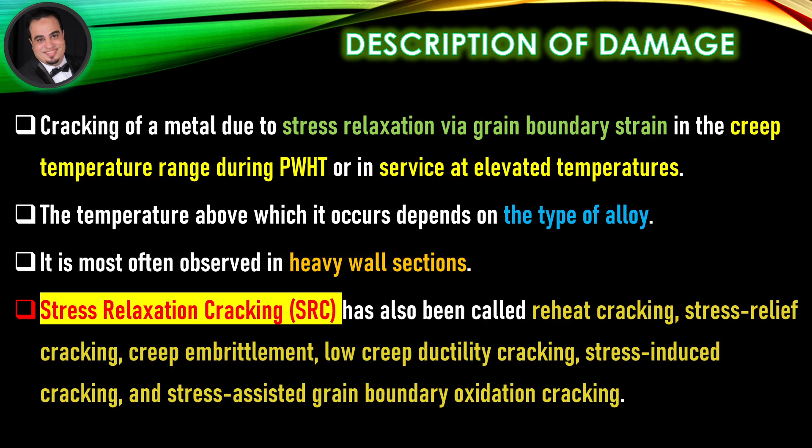Affected materials: chromium molybdenum steels, especially 2-1/4 chromium 1 molybdenum steel with vanadium added, 1 chromium 1/2 molybdenum, and 1-1/4 chromium 1/2 molybdenum. Types 304H, 316H, 321, and 347 stainless steel.

Nickel-based alloys, particularly alloy 800H, 800HT, alloy 617, and centrifugally cast 22 chromium 35 nickel niobium, used for heavy wall piping and headers in hydrogen reformer heaters. High-strength low-alloy steels are very susceptible.

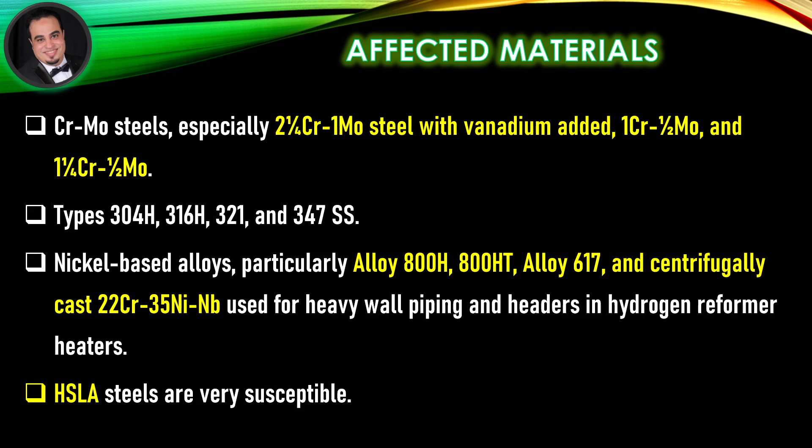Critical factors: in addition to exposure to elevated temperature in the creep range, important parameters include the type of material, chemical composition, impurity elements, grain size, weld metal and base metal strength, residual stresses from fabrication, cold working, welding, section thickness which controls restraint and stress state, notches and stress concentrators, and welding and heat treating applied.

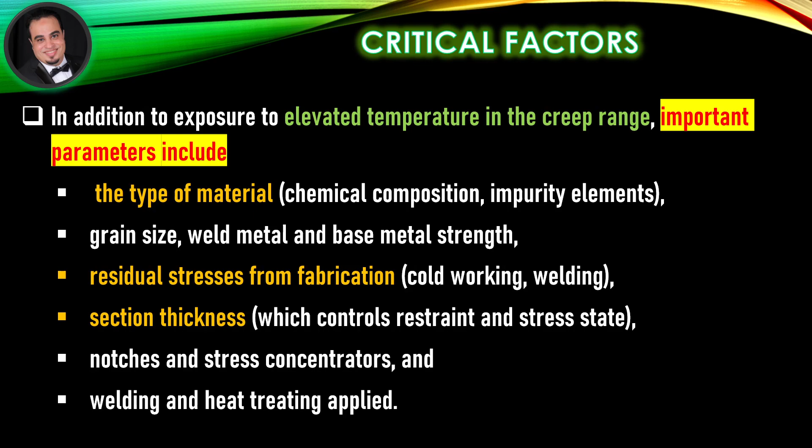Stress relaxation cracking occurs at elevated temperatures, when creep ductility is insufficient to accommodate the strains required for the relief of applied or residual stresses.

Stress relaxation cracking can either occur during post-weld heat treatment or in service at high temperature. It is normally more prevalent where large grain size exists, particularly in the low-alloy steels, for example in the coarse-grained heat-affected zone.

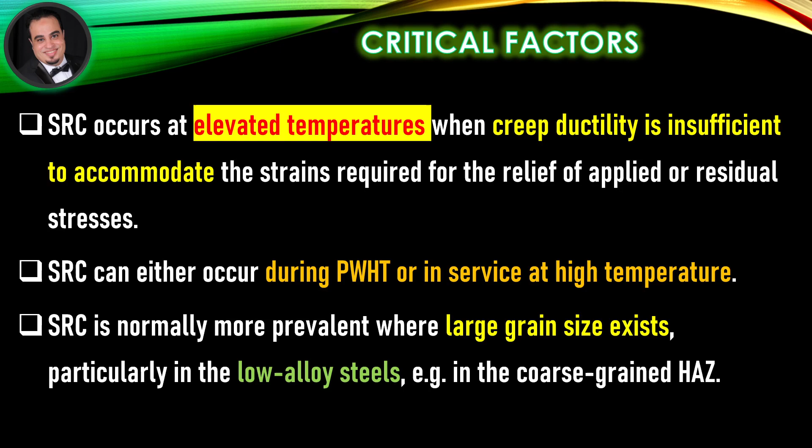The approximate temperatures above which, or ranges within which, stress relaxation cracking occurs for different types of alloys are as follows: 2-1/4 chromium 1 molybdenum vanadium, 840 degrees Fahrenheit. 1 chromium 1/2 molybdenum, and 1-1/4 chromium 1/2 molybdenum, 900 degrees Fahrenheit.

Types 347, 321, and 304H stainless steel, 930 degrees Fahrenheit to 1380 degrees Fahrenheit.

Nickel-based alloys, 930 degrees Fahrenheit to 1380 degrees Fahrenheit.

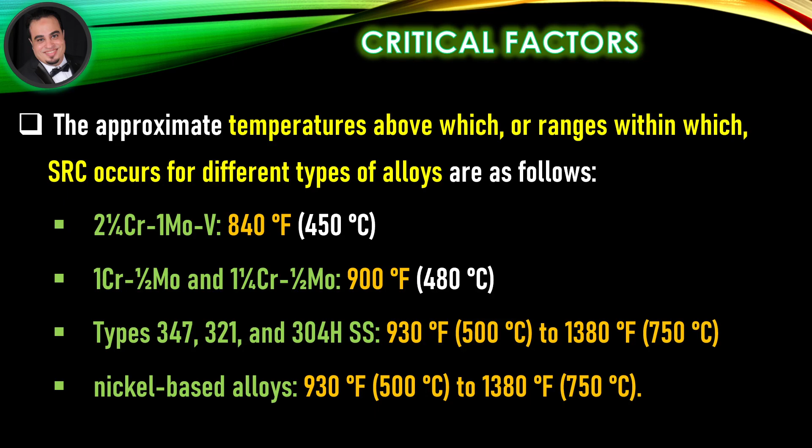Stress relief and stabilization heat treatment of types 321 and 347 stainless steel, for maximizing chloride stress corrosion cracking and/or polythionic acid stress corrosion cracking resistance, can cause stress relaxation cracking problems, particularly in thicker sections. In the first half of 2008, numerous cases of stress relaxation cracking,

primarily referred to as reheat cracking, occurred during 2-1/4 chromium 1 molybdenum vanadium reactor fabrication. The cracks were in weld metal only, transverse to the welding direction, and in only submerged arc welding welds. It was traced to a contaminant in the welding flux.

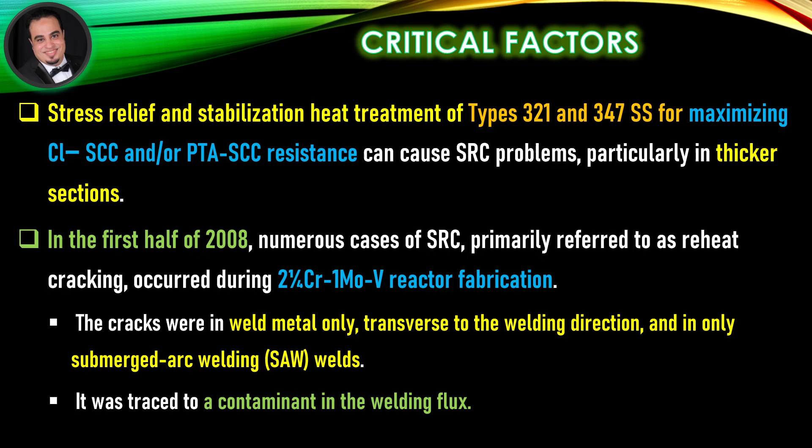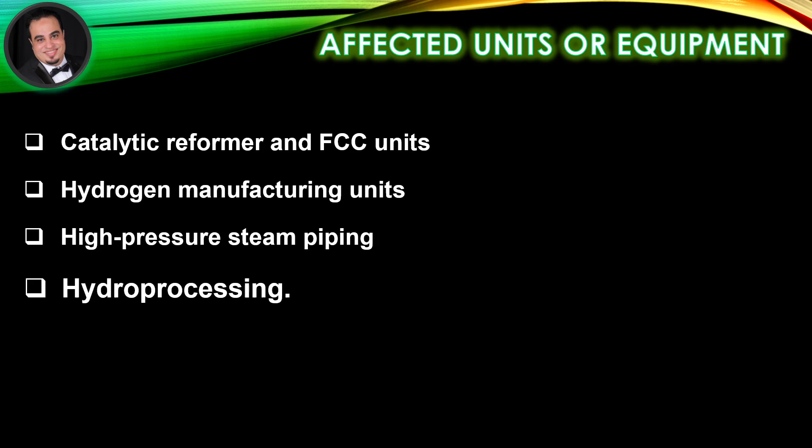Affected units or equipment: catalytic reformer and FCC units, hydrogen manufacturing units, high-pressure steam piping, hydroprocessing.

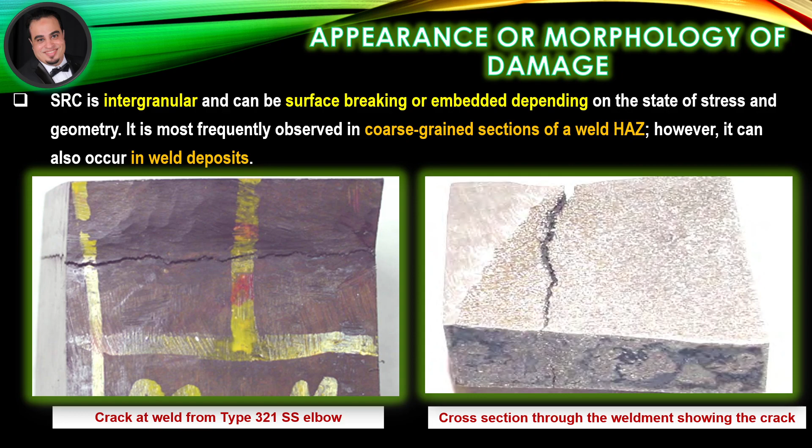Crack at weld from type 321 stainless steel elbow, and cross-section through the weldment showing the crack, as illustrated in figures. Photomicrographs of the weldment area, for cross-section through the weldment showing the crack.

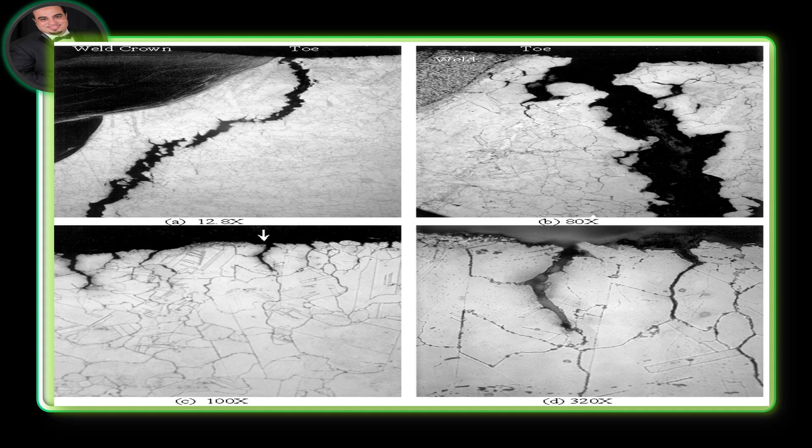Prevention, mitigation: joints and nozzles in 1 chromium 1/2 molybdenum and 1-1/4 chromium 1/2 molybdenum vessels and piping, especially heavy wall sections, should be designed to minimize stress concentration as well as restraint during welding and post-weld heat treatment. Adequate preheat must also be applied.

In design and fabrication, it is advisable to avoid sharp changes in cross-section, such as short radius fillets or undercuts, that can give rise to stress concentrations. Low heat input welding procedures help minimize grain coarsening in the heat-affected zone.

Heating rates at temperatures above 480 degrees Fahrenheit should generally comply with the limits provided by ASME Section 8 for post-weld heat treatment.

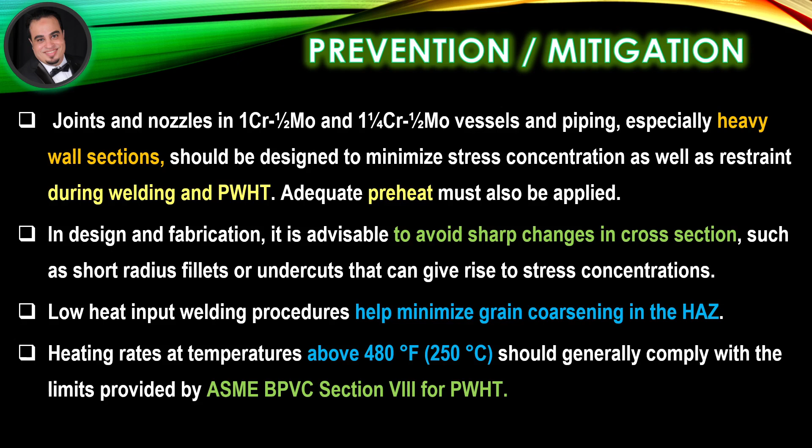Metallurgical notches arising from the welding operation are frequently the cause of cracking at the boundary between the weld and the heat-affected zone, for 1 chromium 1/2 molybdenum and 1-1/4 chromium 1/2 molybdenum.

Vessels operating above 900 degrees Fahrenheit, follow the material grade and post-weld heat treatment temperature guidelines in API 934E. For 2-1/4 chromium 1 molybdenum vanadium welds, consider the recommendations for welding material screening tests in API 934A.

For thick wall type 321 or 347 stainless steel piping, consider the possibility of stress relaxation cracking in deciding whether to post-weld heat treat.

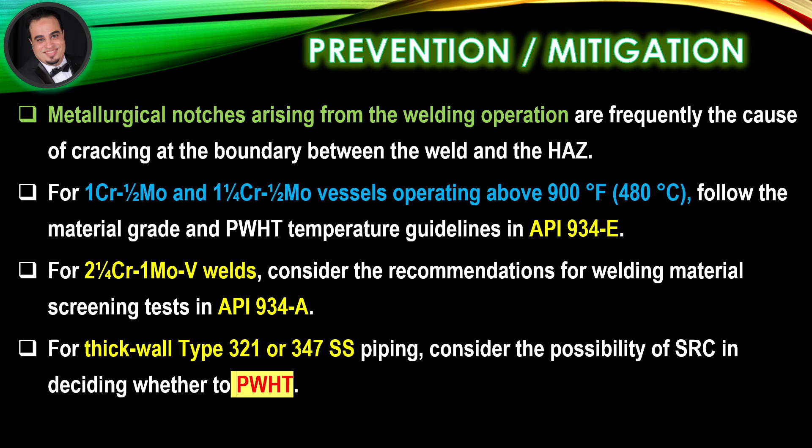Inspection and monitoring: for chromium molybdenum steels, surface cracks can be detected with WFMT, MT, or PT. For type 321 and 347 stainless steel as well as the nickel-based alloys, PT or angle beam UT, SWUT or PAUT examination can be used to detect cracks.

Special procedures, equipment, and interpretation are often required for angle beam UT inspection of austenitic materials with a thickness greater than 3/4 inches, 19 mm, compared to similar thickness non-austenitic materials. Embedded cracks can only be found by UT examination.

Inspection for cracking in 2-1/4 chromium 1 molybdenum vanadium reactors during fabrication is typically done with TOFD and/or angle beam UT, SWUT or PAUT, with the demonstration block having defects as small as 3 mm side drilled holes, as described in API 934A.

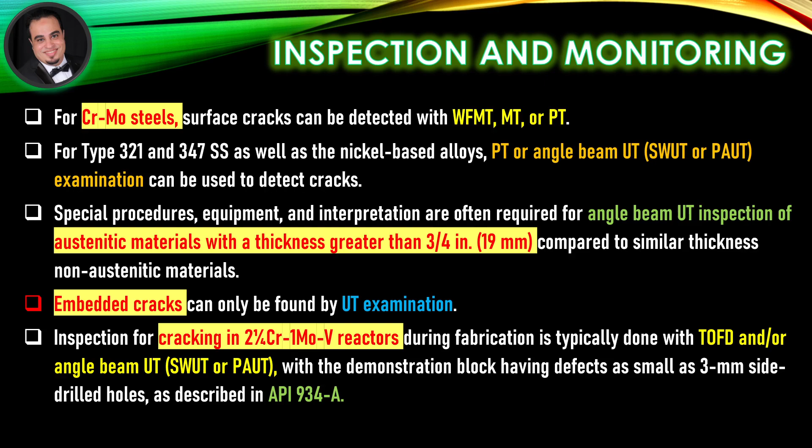Related mechanism to stress relaxation cracking, reheat cracking, is creep and stress rupture. Stress relaxation cracking has also been referred to as reheat cracking, stress relief cracking, creep embrittlement, low creep ductility cracking, stress-induced cracking, and stress-assisted grain boundary oxidation cracking.

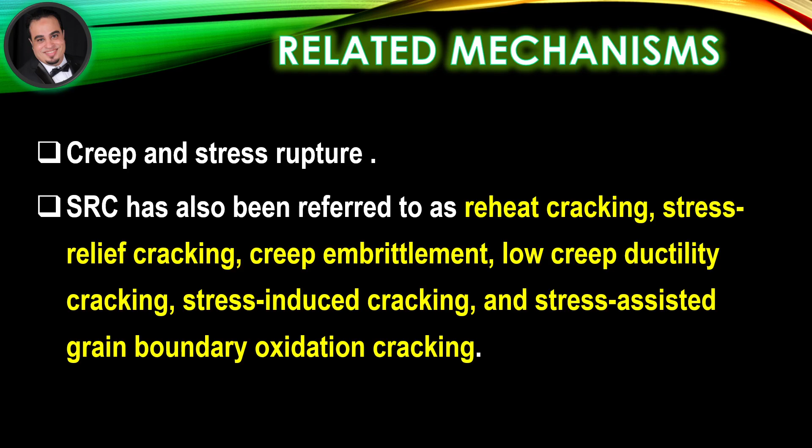Summary. Description: reheat cracking due to stress relaxation during post-weld heat treatment or in service at elevated temperatures. Reheat cracking more likely to occur in thicker sections and higher strength materials. Reheat cracking is intergranular. Temperature range.

During PWHT or in service at elevated temperature, in the creep range. Affected metallurgy: low alloy steels as well as 300 series stainless steel and nickel base alloys.

Prevention: designed to minimize restraint, avoid sharp changes in cross-section, using low heat input welding procedures.

Inspection methods: WFMT, MT, or PT examination of carbon and low alloy steels. PT or angle beam UT, SWUT or PAUT, examination of 300 series stainless steel and nickel base alloys.

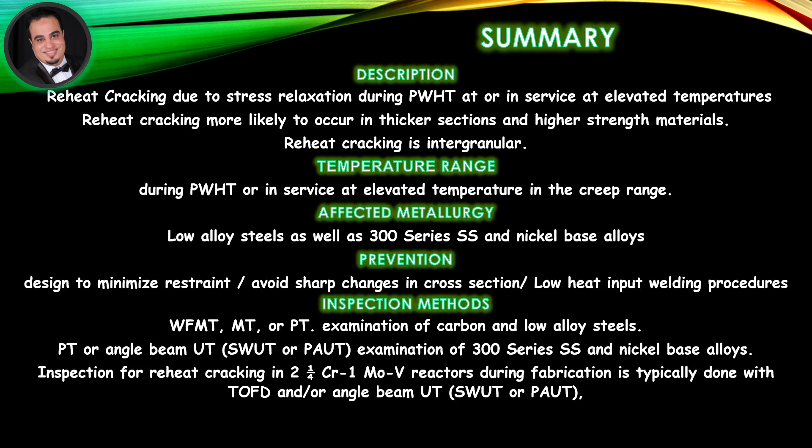Practice time. Question number 1: a metal cracks because of stress relaxation during post-weld heat treatment of heavy wall section that is operating at elevating temperature. This type of crack is best categorized as...

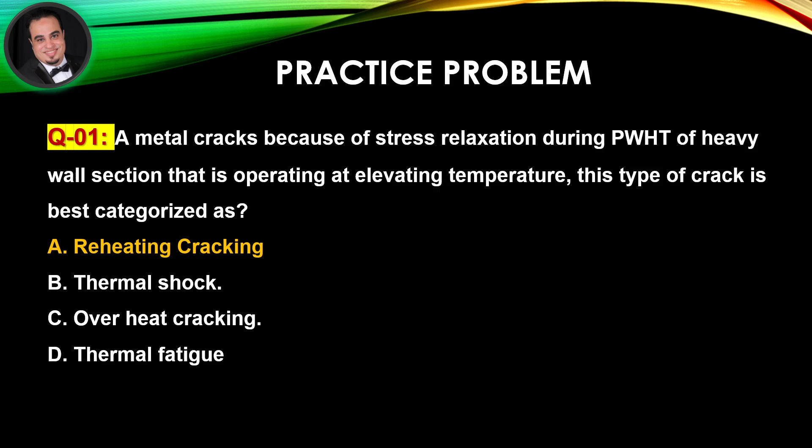Question number 2. Which of the following statements about stress relaxation cracking, reheat cracking, is correct?

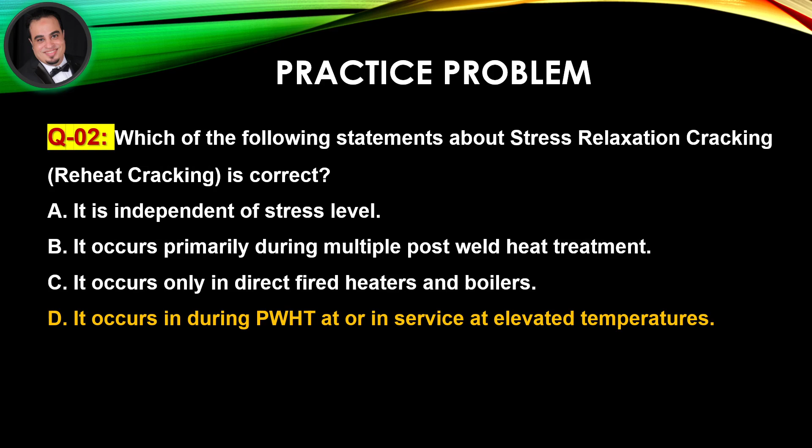Question number 3. What is other name for reheat cracking?